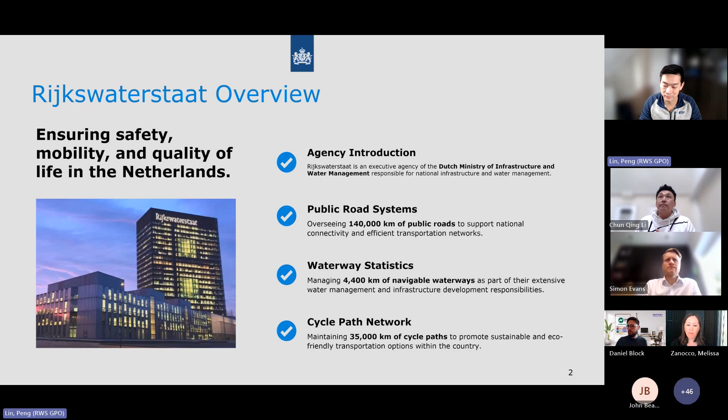We have 9,000 colleagues managing 140,000 kilometers, 4.4 thousand waterways, and 35,000 kilometers of cycle paths. I would like to show you a small video about the digital twin in Rijkswaterstaat. It is in Dutch, but I will translate it into English.

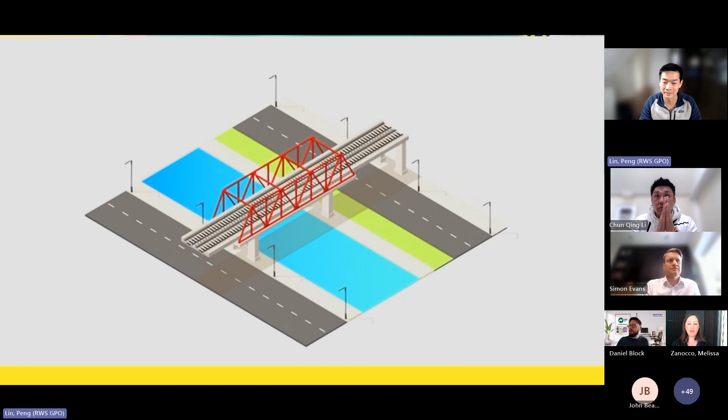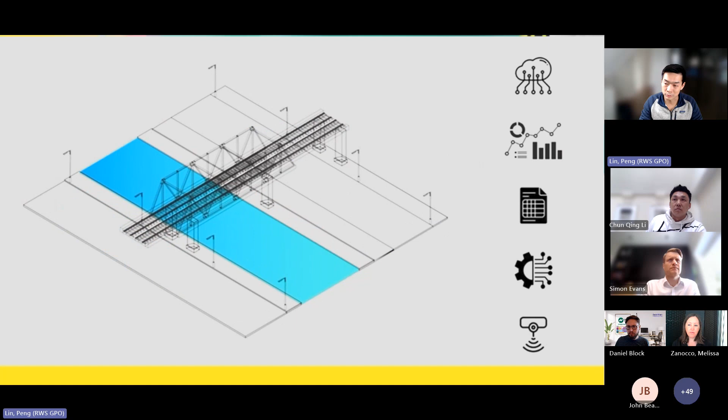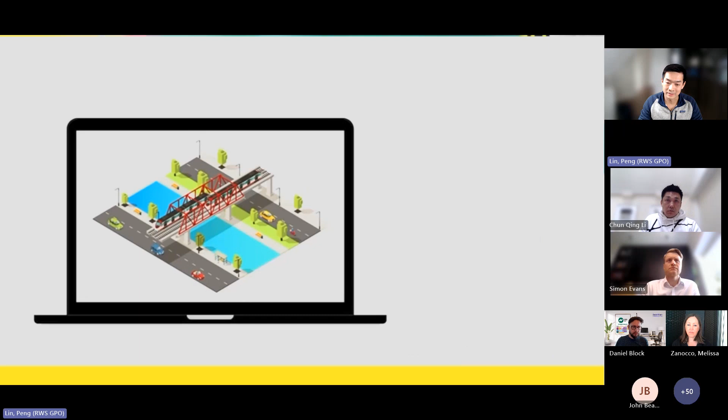In Rijkswaterstaat, we have a digital twin system, and by 2030 we are going to put all the infrastructures into the digital twin system. It will include all the key information of the infrastructures, and it will help us to make decisions. The digital twin system includes all the data from different sources to help us visualize it in 2D and also in 3D. With this system, we can combine different data sources.

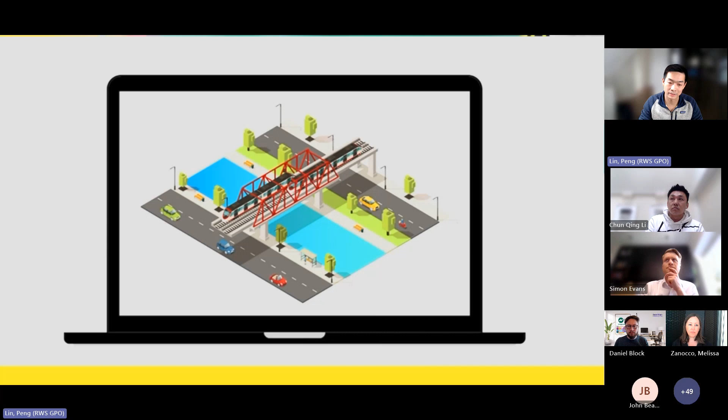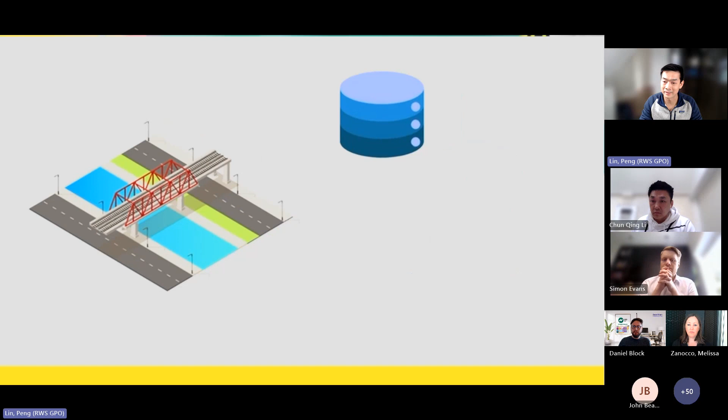It has several advantages. Firstly, we can see different material components and structures from the map, and meanwhile we can combine it with the monitoring sensor data, and also include traffic and weather data in one system. In that way, we can build one data lake, which is very helpful for our data analysis. Based on recent AI technology, we can build many prediction models for different infrastructures, and it will help us make decisions to find the balance point for the economy, society, and the environment.

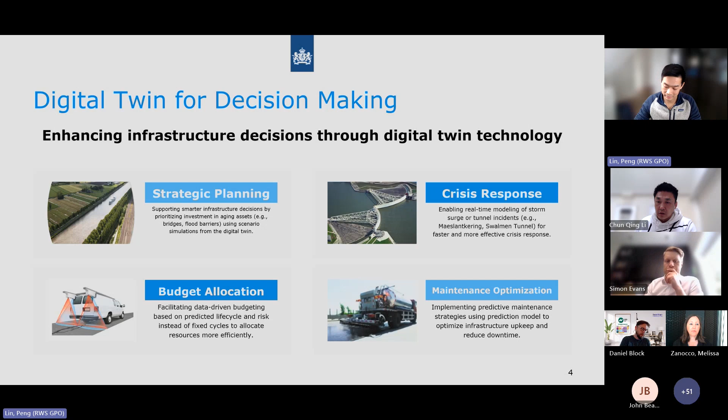Based on this, today I will give examples of how we make decisions based on this digital twin system. I will give examples in the following four aspects. First is about how we make strategic planning.

The Amsterdam Rhine Canal is one of the busiest canals in the whole of Europe. When we want to do maintenance for this canal, there's a big challenge because we have to take five aspects into consideration: the water level, the infrastructure, the sediment, ecology, and climate adaptation. But it is really difficult to quantify the influence of the different aspects.

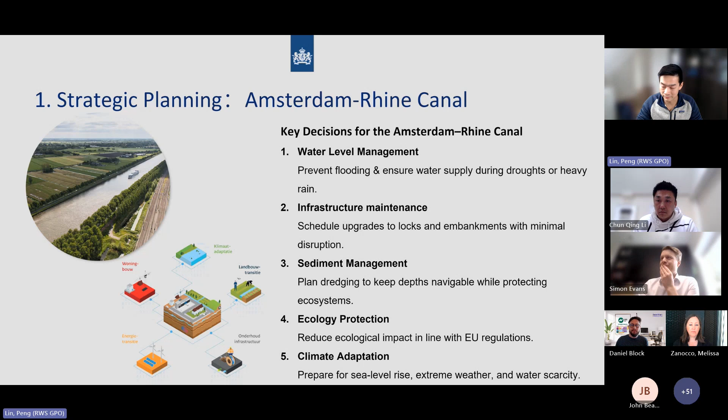To meet this challenge, we built a digital twin system called WFD, developed by WL Delft. With this system, we can evaluate different design scenarios without digging into the ground. Based on this system, we finally found the balance point of different stakeholders and optimized the design. In the end, it was a very successful project.

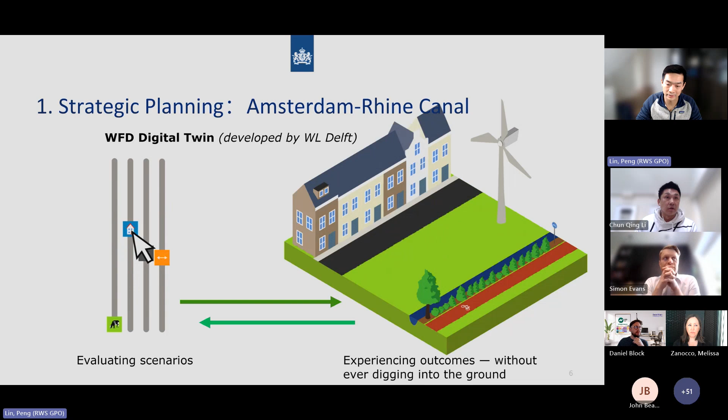The second example is about crisis response. We take the Maeslant barrier as an example. It is the biggest barrier in the world, and it is very important because if there's a failure, the west of the Netherlands will be underwater. This barrier opens every 7 years. The challenge is that it's really difficult to monitor component degradation, and the environment and the weather are changing every year, all over the world.

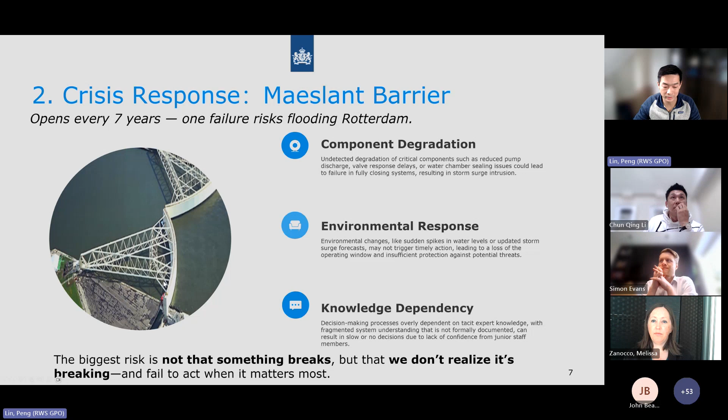So the biggest risk for this project is not that something happens, but that we don't realize it is happening. Without the digital twin network, we may fail to react when it matters most. So we also built a digital twin system for it. It is based on real-time monitoring and integrates 3 models: the hydrostatic model, the pump discharge, and the failure probabilistic model. It helps us decide when to open the barrier and when to exchange the components of this barrier.

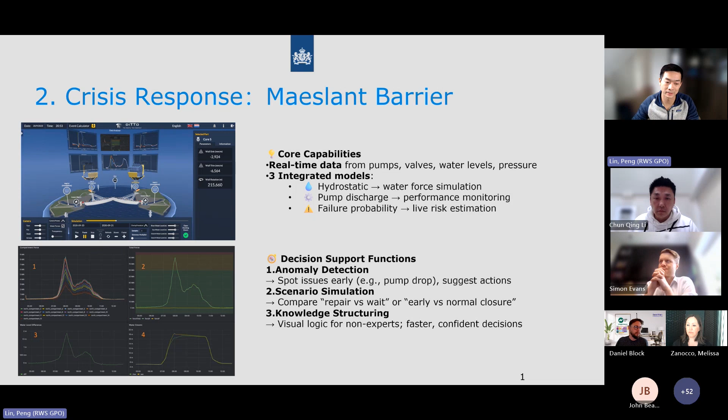The third example is about the digital twin for road maintenance. For the road network in the Netherlands, we have a specific system called BIM-PROVESY, and it helps us in these 4 aspects. But the key challenge is real-time monitoring. How can we monitor the condition of the road structures frequently?

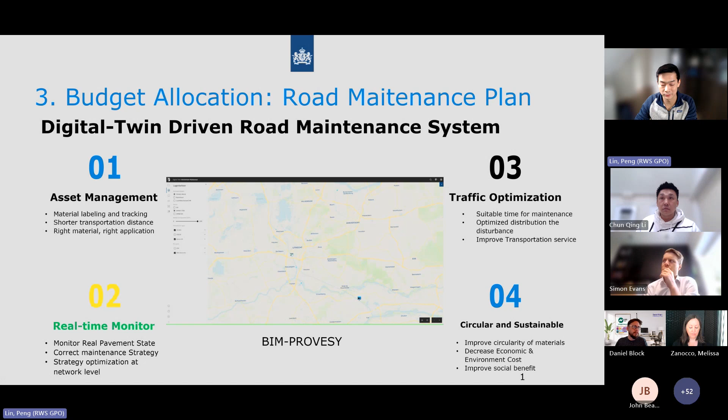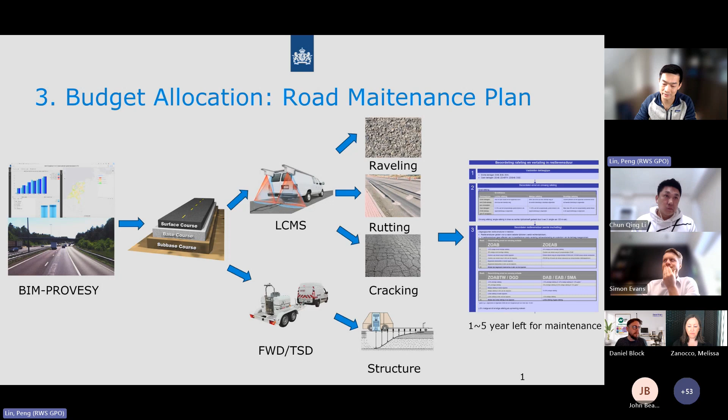Our solution is that we monitor the surface layer of the pavement with the LCMS system, the laser cracking measurement system. It helps us monitor the rutting and the cracking of the road. We also combine the FWD and TSD measurement systems to monitor the health condition of the structure. Based on all of these conditions, we can use a table to determine after how many years we should do maintenance. In this way, we can distribute our budget across different parts of the highway.

Another example is about how we optimize maintenance. In the Netherlands, the biggest challenge is raveling. As we all know, roads have different lanes, and on the right lanes the traffic load is always a little higher. So the development of raveling on different lanes is not homogeneous, and maintenance becomes a big challenge because we cannot do maintenance for the whole road.

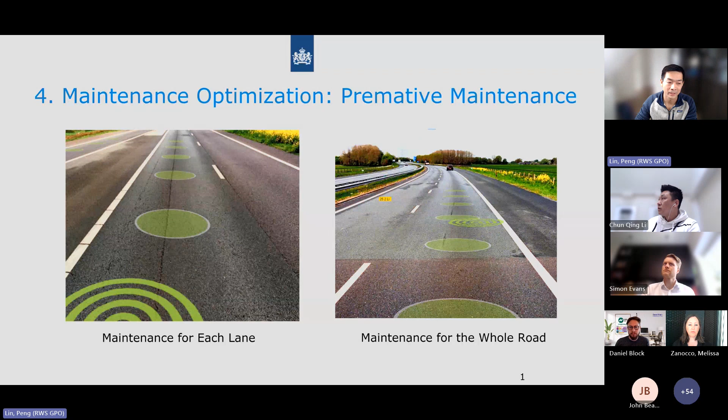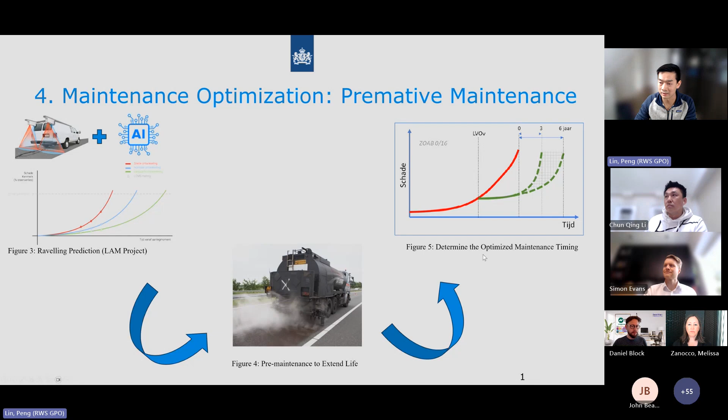To solve this problem, we fully used the digital twin data together with an AI model in a project called LAM. We built prediction models for different lanes, so we know how raveling develops on each lane. Afterwards, for the right lane, we can use a pre-maintenance method to extend the lifespan. In this way, we can optimize the maintenance timing for different lanes and make maintenance more efficient and more economical.